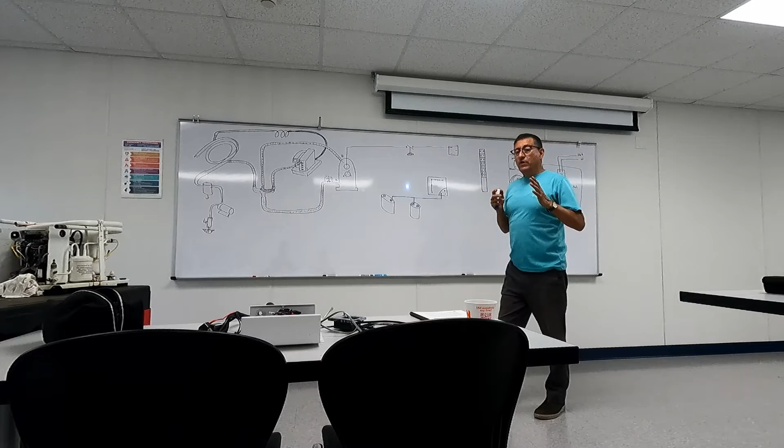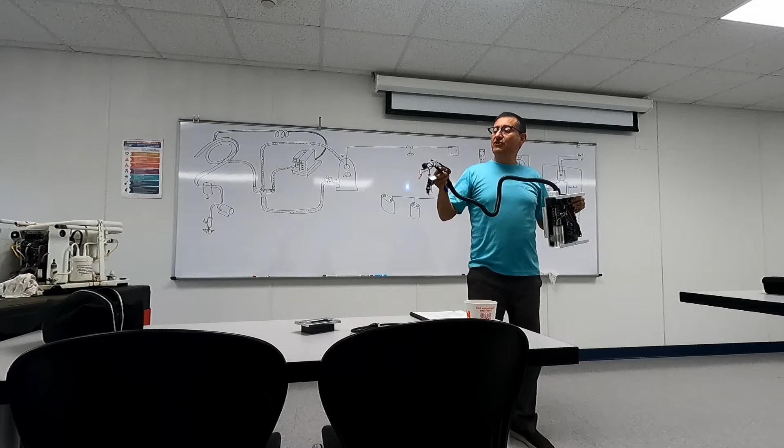We are going to do the wiring, the complete harness of an air conditioning equipment, starting in the capacitors, the circuit board, the triac, and finishing into the sensors and the high pressure, low pressure switch. This is the harness of an air conditioning equipment.

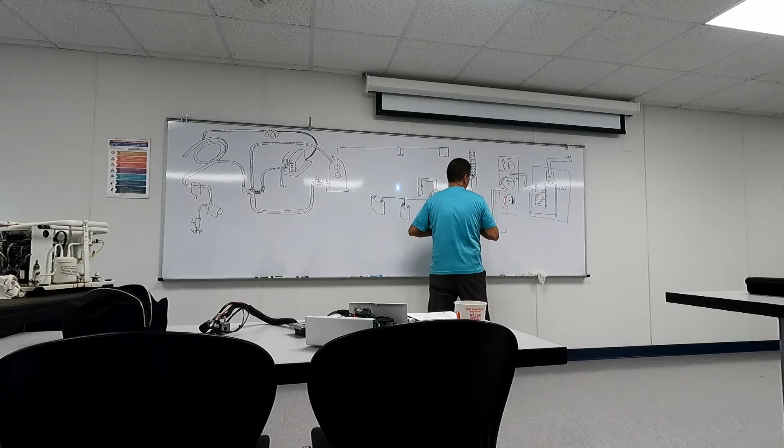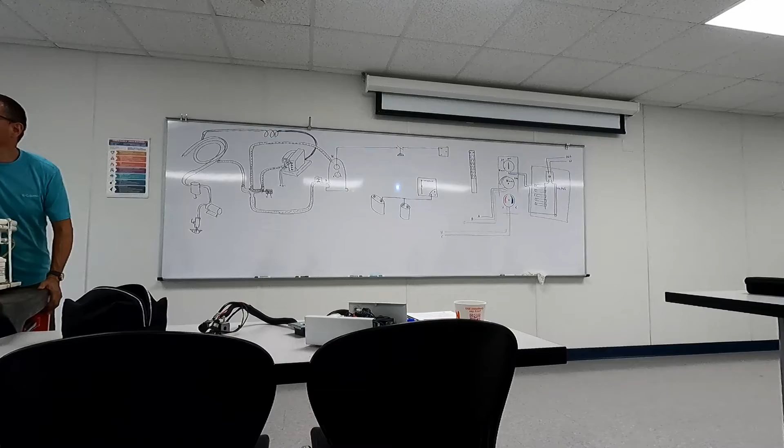We are going to try to understand what happened in this box. We are going to figure out how is the wiring here, how is the connection in the control box. This is the typical connection box. This is exactly the same like this.

This is an electronic control box, and this is a mechanical control box. It's the same, it's the same. Electronic, because this one normally was used with electronic thermostat, and that one is used with mechanical thermostat, those thermostats.

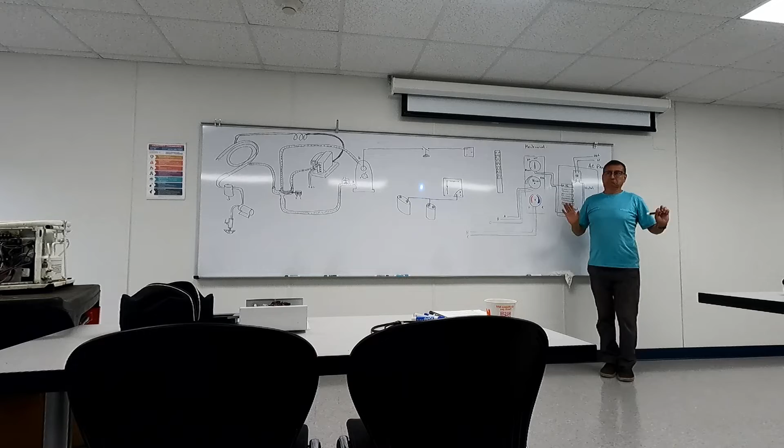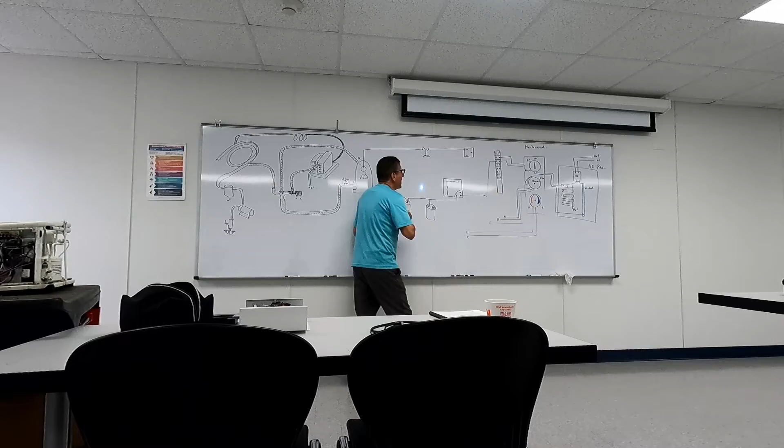In that corner, in the bottom, you have all the neutrals. And you have other three corners, and now we are going to figure out what is the meaning of that. This is the system relay. One corner in the bottom is for neutrals, right?

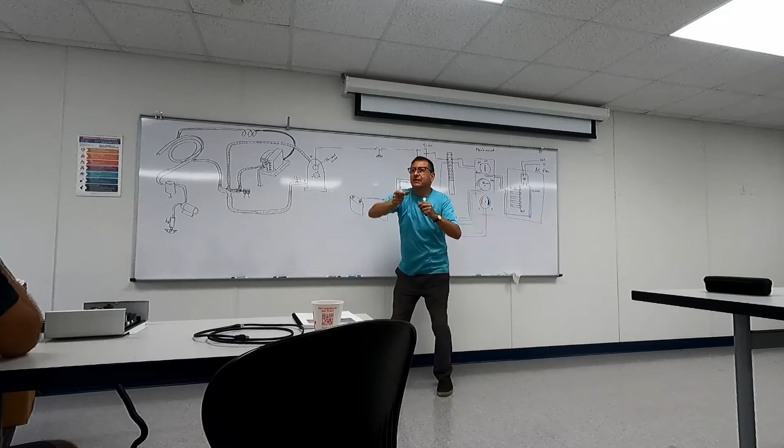In the compressor, my friends, you have a small pipe coming out and a big pipe coming in. The small pipe is the high pressure. In the high pressure side, you have the high pressure switch.

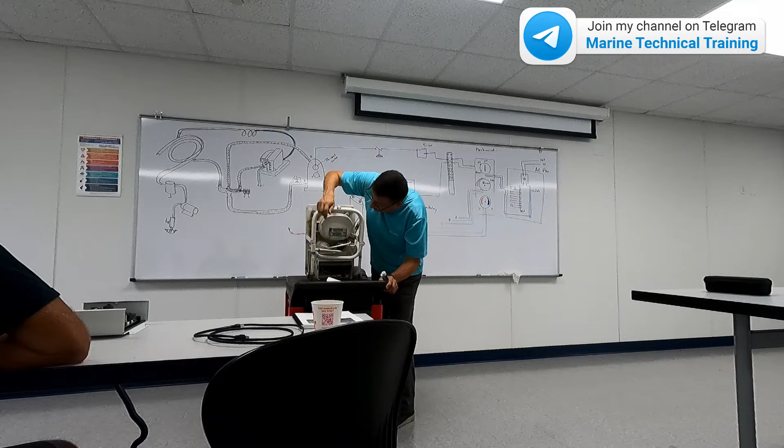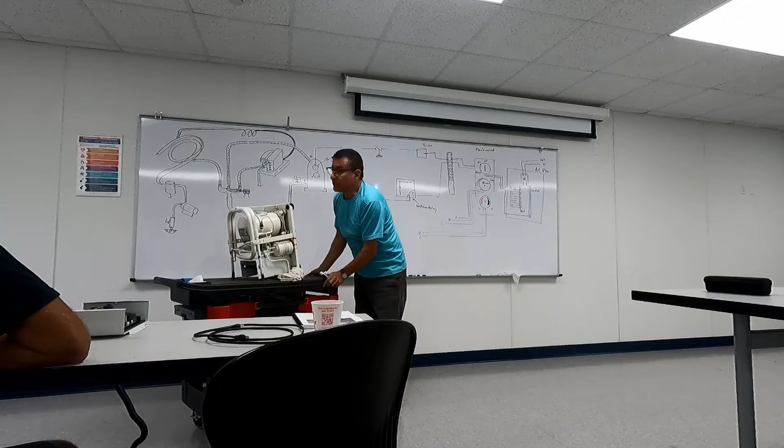Some units in the low pressure side, they have other low pressure switch. Both of them have the same function. What is the function of both switches? To turn off the compressor, kill the compressor and protect the compressor. Okay, that's the high pressure switch, and this is the switch.

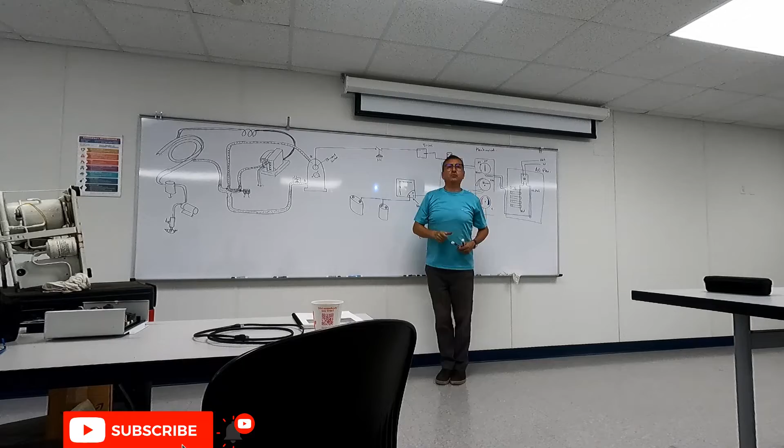When the case of the compressor is too hot - in what case the case will be too hot? It's running without refrigerant, correct? Correct. Too much, the number one reason: humidity. Too much humidity, moisture, humidity in the refrigerant increase the temperature of the compressor. The moisture is the enemy of the compressor.

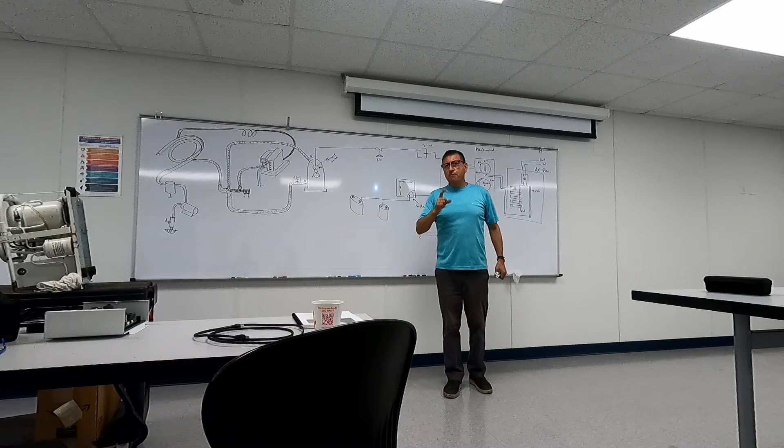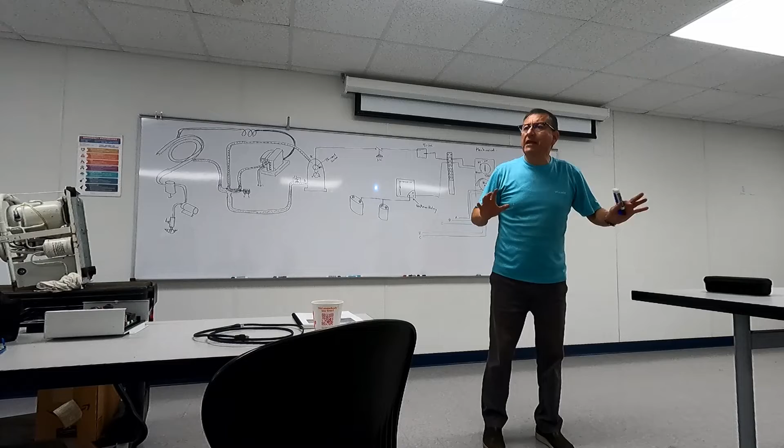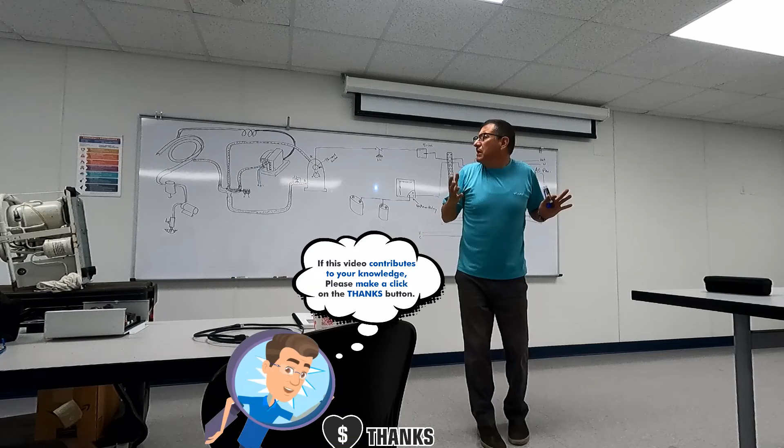How does the moisture enter in the system? Through the condenser fittings or the pad. In what part can moisture enter in the system, the closed system? Look at the system, look at the system. In what part? The condenser coils, through the fitting, any part where the pipes are cracked - a leak.

In the moment when you introduce the fittings to connect the gauge, you hear normally a lot of refrigerant going out. In that moment, air enters. For that reason, it's not recommended to connect the pressure gauge constantly, too much.

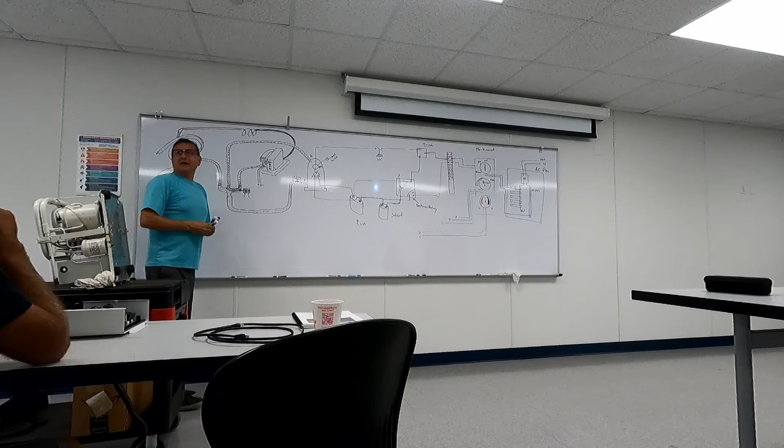Example, this capacitor - the label said in between 21 and 25 microfarads. I am going to check if this capacitor is okay. I select capacitors, is the yellow function. I apply capacitors, should be in between 21 and 25 microfarads.

How much? 38. It's no good. 39, it's not good - 39 microfarads, and the limit is 25. Is the capacitor good? No, it's damaged. That capacitor should be replaced. You understand? That capacitor probably produced the problem in this unit originally.

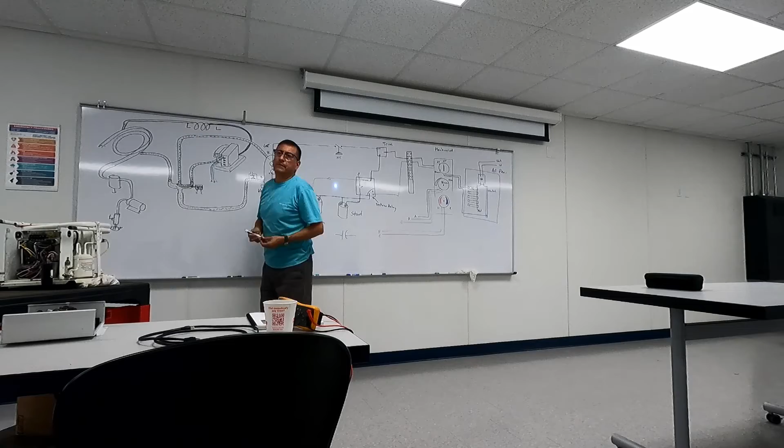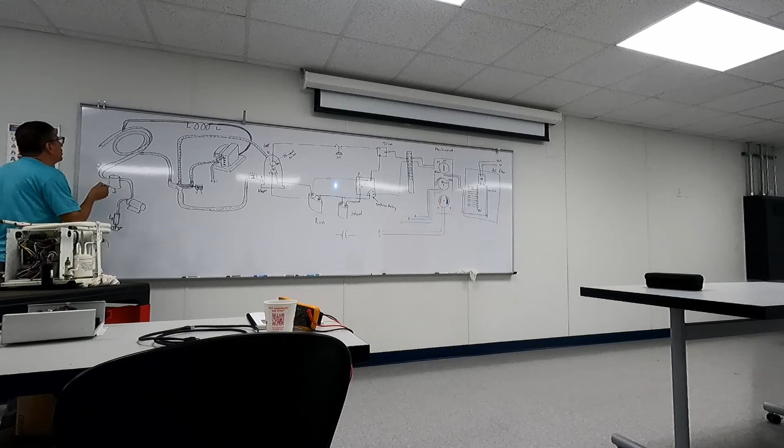Coil, or outdoor coil - what is the name of this coil? Evaporator. Evaporator or indoor coil. Where is that one located? Inside. Inside. No, this is the outdoor coil.

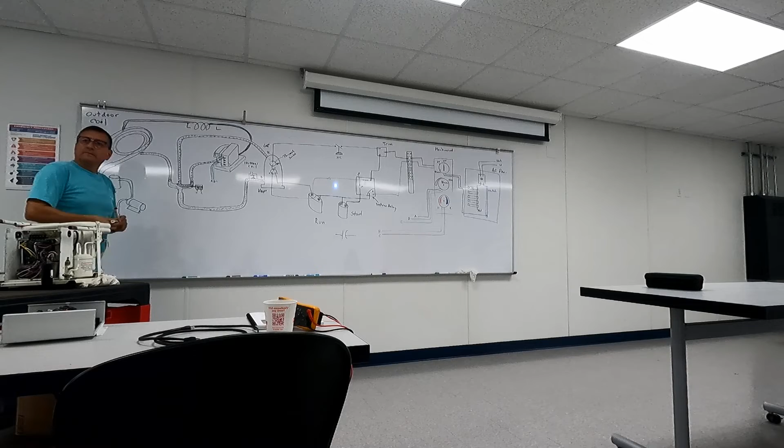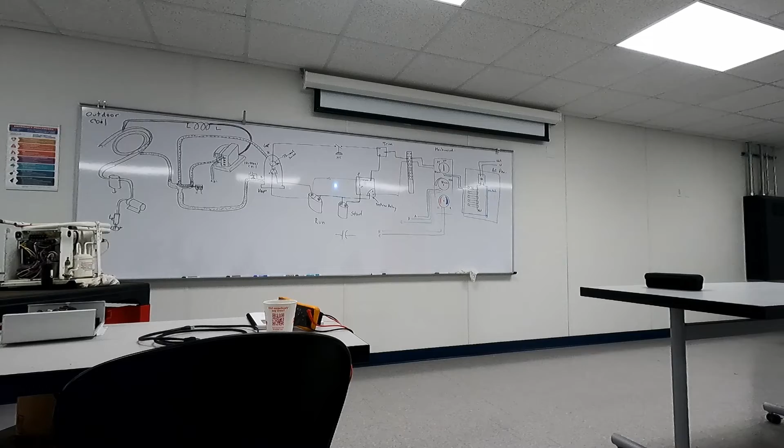When the hot refrigerant is going to the outdoor coil, what mode of refrigeration do I have? Heating up? Cold? Cooling mode. Cooling mode, the hot is outside. What happens when you put your hand? It's too hot, getting rid of the heat. This is cooling mode. In this moment is in cooling, cooling mode. Pay attention to this.

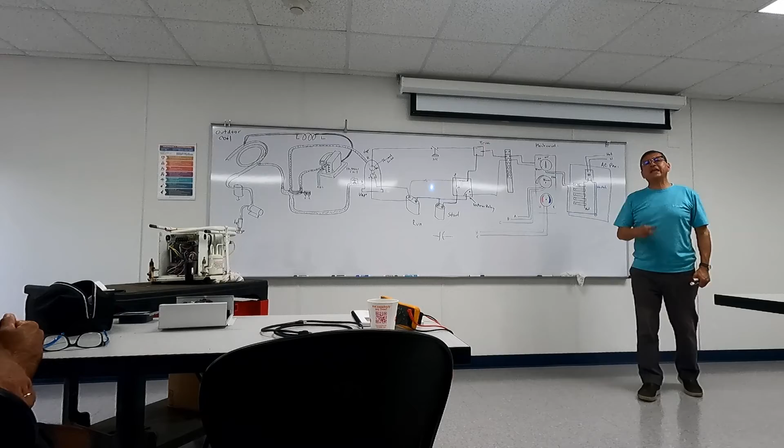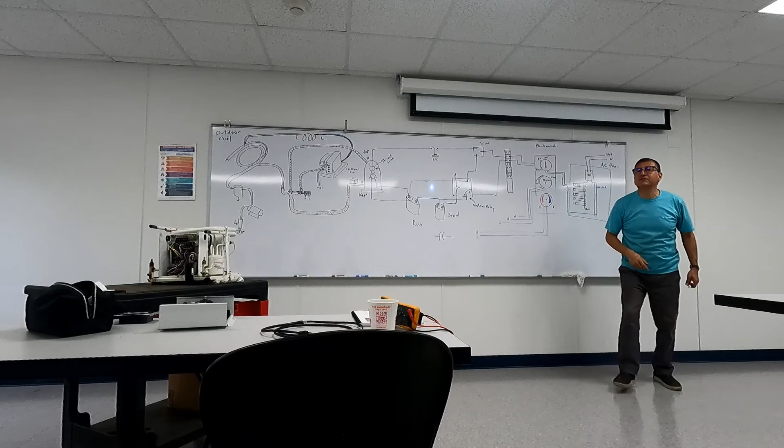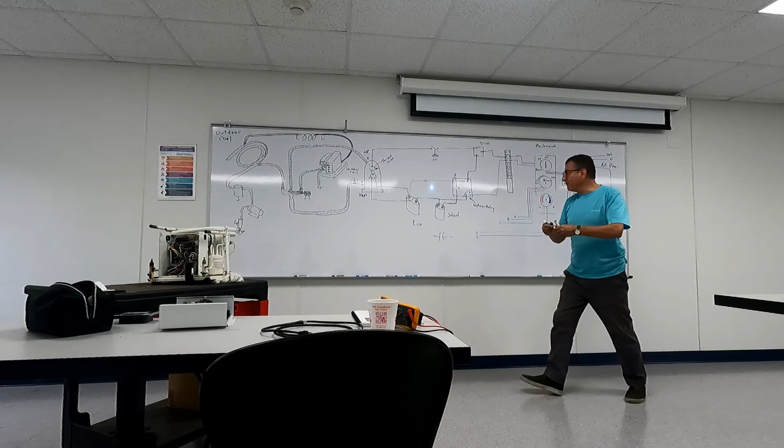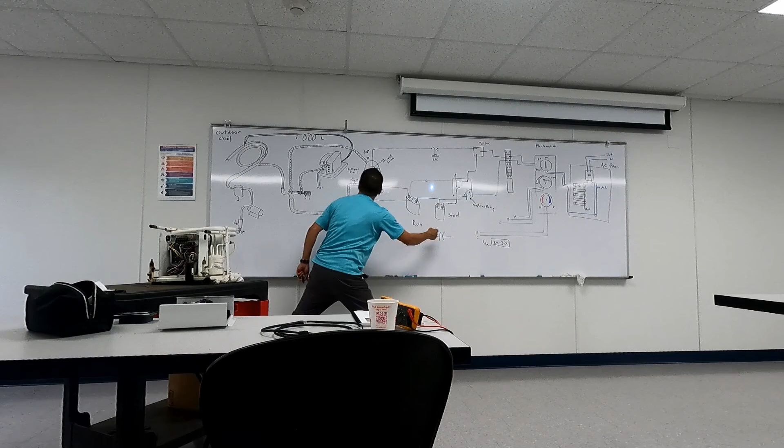24 to 30 volts. It's in between 24 and 30 volts AC. Volts AC, in between 24 and 30 volts AC. AC is an AC signal entering here. AC, not DC. Anybody follow me?